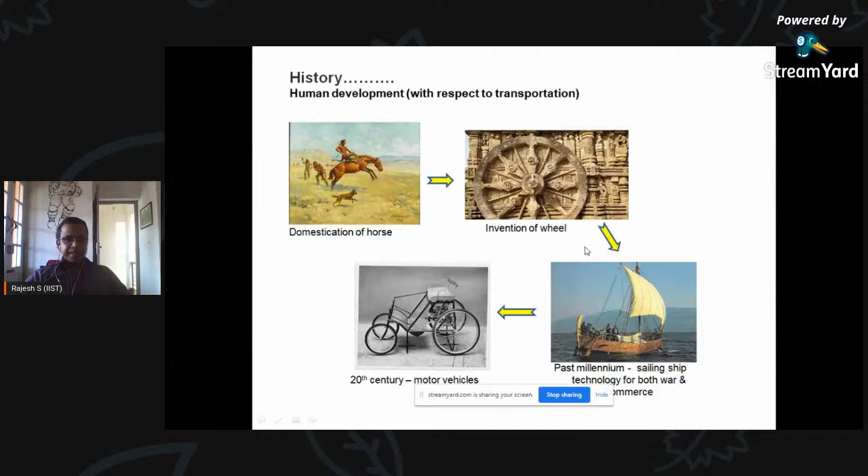If you look into aerospace propulsion, it's basically that we started seeing birds and we wanted to fly, as simple as that. You might remember the grainy images of people putting artificial wings on their hands and trying to jump from a cliff, imitating birds. That's all our ambition to fly—if birds can fly, why not us?

It's the same ambition, and it became successful with the Wright brothers' first flight. It was only for a short duration, but still it was historic. That revolutionized our transport system. Then massive improvements came throughout history, irrespective of which technology you take.

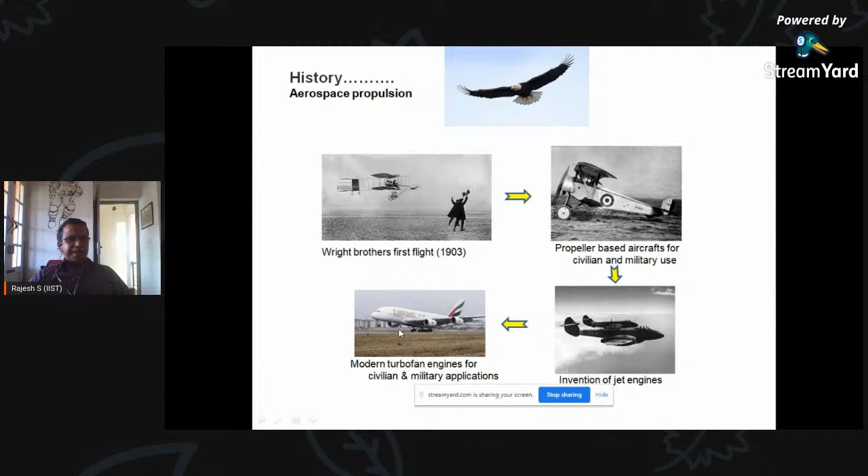Massive progress in technology comes during war, because our human wiring is greed, and we are always good at killing people—that is where technology moves fast forward. Anywhere in history you see it's always military targets, military ambition accelerating progress. Aerospace propulsion sadly was no different: the First World War brought propeller aircraft, the Second World War brought jet engines, revolutionizing aerospace propulsion. Now we have high-tech, low-polluting, very efficient engines for military as well as civilian applications. That's just a sneak preview of the history.

Now we'll go into how these aircraft fly. There are different forces acting on the aircraft. As you know, the engine provides some thrust, so that's moving it forward—that is the thrust produced by the engine. But the body of the aircraft and everything we have, it's not an ideal process.

There are always losses associated with it. There is some resistance to the flight, which in aircraft terminology we call drag. So the thrust is balanced by the drag.

Only when you overcome the drag, you are going to get a forward movement. Similarly, if you are talking about flying, there is always a weight that is going down, and you have to create some kind of force up, to create that flying movement.

That is what is called the lift. The lift is always counterbalancing the weight. When you have the lift more than the weight, you are flying. This is achieved by a nicely engineered structure in the wings, called an aerofoil.

You can see it is not a flat disc or something, it is basically a contoured shape. We have a flat lower profile, and then there is a contoured surface on the upper side. This is purposefully done so that, when you have a longer distance, the air flowing through this top surface has to travel a longer distance when compared to the air flowing underneath the aerofoil.

At this point, it has to arrive at the same time, so the top flow has to move at a much faster velocity. Higher velocity means you are producing a lower pressure on the top surface when compared to the bottom side. That means you are creating a pressure differential, with higher pressure at the bottom and lower pressure on the top.

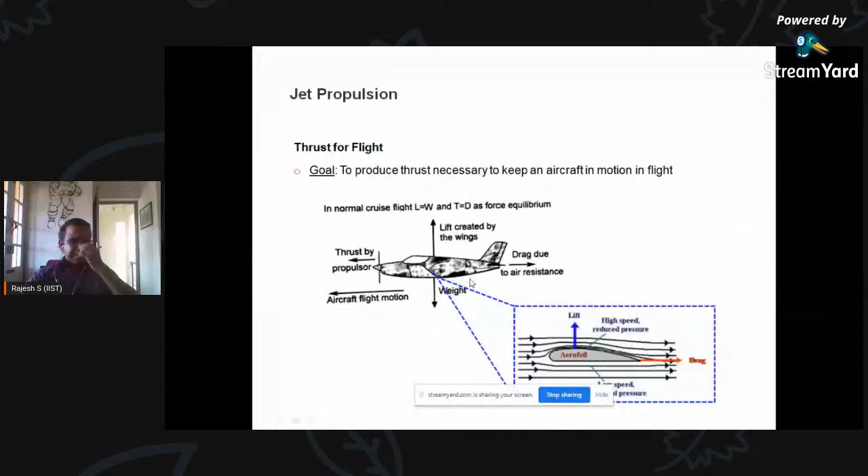The runway is where the pilot accelerates, pushes the stick forward, and the aircraft moves and accelerates forward. That is to create this huge amount of velocity over the aerofoil, so that after some distance sufficient lift is produced and the aircraft can fly. So this is basically how aircraft fly, or what forces are associated with the aircraft.

And then, you might have seen, it is not just jet engines that are flying, but there are also propeller engines. Even though propeller technology came into being in the First World War, we are still using it because there is an obvious advantage of propellers when compared to jet engines. Propeller aircraft are much more efficient at lower flight speeds compared to jet propulsion.

Jet engines need a sufficient amount of velocity to go inside and come out, so whatever momentum the jet propulsion engine creates depends upon the velocity of the air coming in. At lower velocity it produces lower thrust, and at higher velocity it produces much higher thrust. So jet engines can be more efficient at higher speeds than at lower speeds, whereas propeller aircraft are much more efficient at lower speeds than at higher speeds.

The huge propeller sitting in the front, when it rotates, can suck in a huge amount of air. That creates a huge mass flow rate of air which helps in producing a massive thrust.

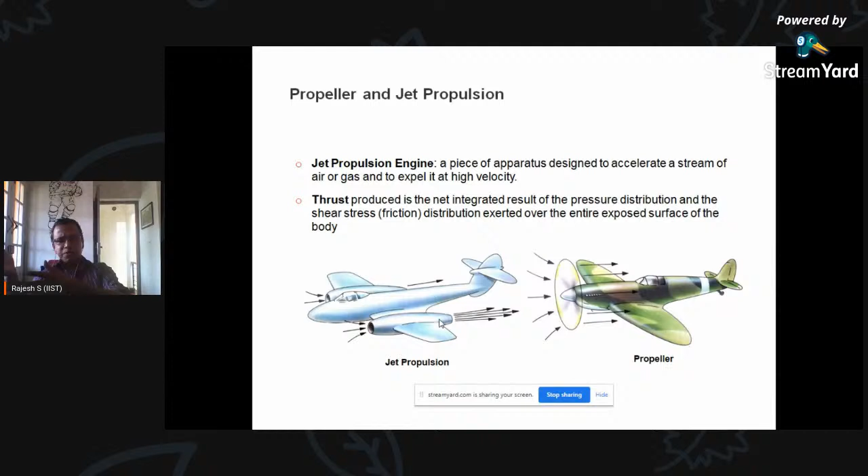So the propeller aircraft accelerates a huge mass flow of air to a lower velocity behind, whereas in jet propulsion the inlet is small compared to the propeller, so it accelerates a smaller mass of air but is capable of accelerating it to extremely higher speeds than a propeller. So there's basically a slight difference between the two: one is good for low velocity applications, the other for higher velocity applications.

So there are different engine concepts if you look into it. We started with what is called a piston engine with propeller. The piston engine is something similar to our automobile engines. These are the ones that were working in the earlier stages of development, especially in World War I and all those things - it's a complicated system.

You might have seen in some museums, you can still see the piston engines, like a collective piston, some 8 to 10 piston engines sitting along the circumference of a circle, providing power for the propeller.

That changed when gas turbine engines were developed in the 1940s - the turbojet engine that revolutionized the aircraft industry. So these are the different types of engines working.

Mostly it's based on what is called a gas turbine or turbojet engine. The other things written here - turboprop, turbo shaft, turbofan - these are all just variants of a gas turbine. So I'll talk about only the gas turbine, how it works, and maybe show on a slide how all these things work. I'll concentrate more on how the gas turbine works, since that is how our commercial airline engines are, and even in military jet aircraft it is still the gas turbine technology with some modifications.

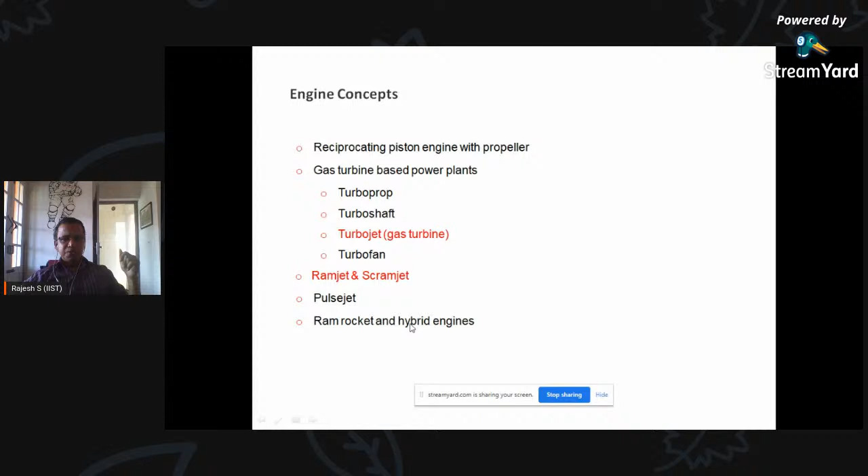Then there are new engines under development. Recently you might have heard about DRDO successfully test firing the hypersonic scramjet engine, so I'll do a couple of slides on what that is. Then there's the pulse jet - this is no longer in use, it was used in World War. And there are hybrid engines also currently under development, I might have one slide on that.

Jet engine - it is also called the Whittle engine, developed in the 1930s. It's not just Sir Frank Whittle who invented the engine, but also someone called Joachim Pabst von Ohain, a German guy, and Whittle is from UK. They were actually working in parallel on the same concept, and they came up with this jet engine almost at the same time.

The patent is awarded to both of them actually, and it works on a thermodynamic cycle called the Brayton cycle, which tells how the air coming in has its thermodynamic properties varied as it passes through the engine and comes out. Basically all this propulsion device works on the fundamental Newton's third law - for every action, there is an equal and opposite reaction.

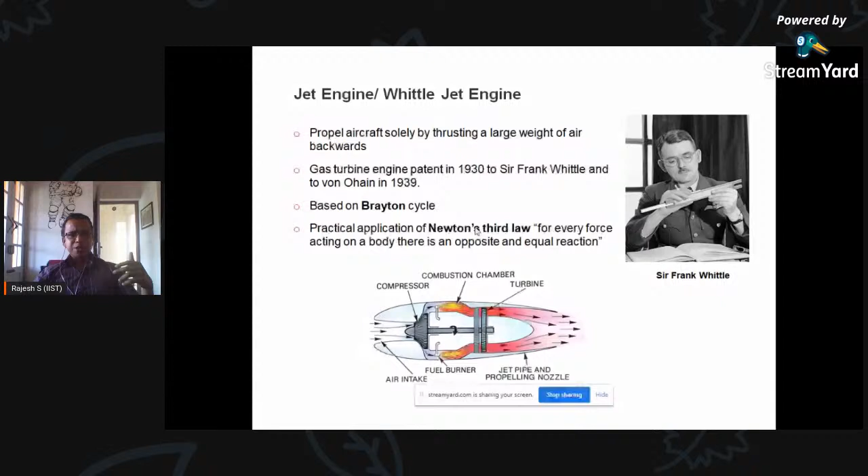Unlike a car engine where there's only a combustion chamber, a jet engine has different components doing different jobs, based on this Brayton cycle. So this is a blown up image of a turbojet engine, and you can see all these blades and things - this is basically the compressor.

Okay, so air coming in is through these different stages, or the different stages of a compressor. There is a small increase in pressure across all these stages, and finally you get a very high pressure when it comes out here, and it is sent into a combustion chamber, and then it is expanded. You can see the shaft connecting the turbine to the compressor. As the turbine runs, it provides the power for the compressor, and it comes out.

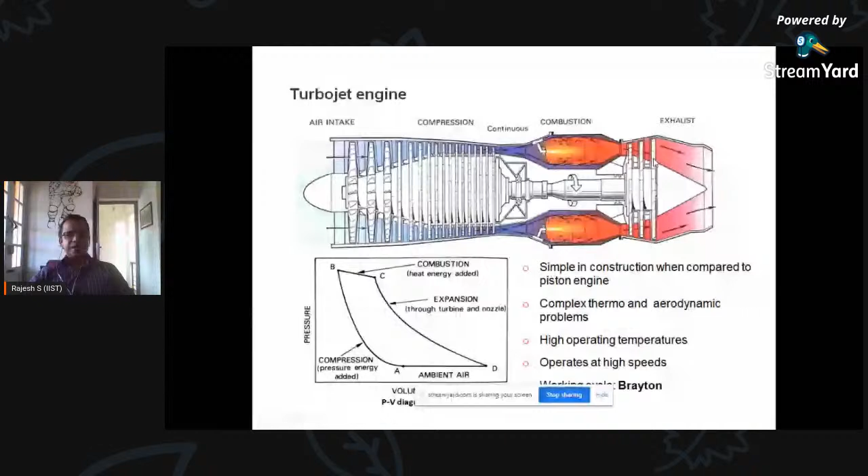A turbojet engine, it is bypassed. That's why it is also called a bypass engine, or a turbofan engine. So it splits into two streams, a bypass stream and a core stream.

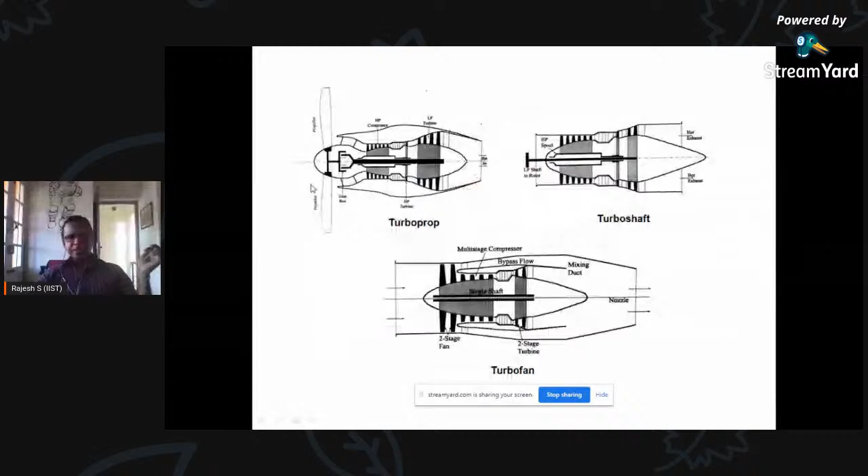It's a ramjet where in all these engines, the flow through the engine is at subsonic velocity, a very slow moving flow inside. Once inside the engine, it's slow moving. Why is it slow? Because in order to light the flame, you cannot do it easily when the wind is blowing, it's difficult to light a candle. It's the same thing, we slow it down so the flame can stabilize.

This is because of a wide range of reasons, the most important being that there is a huge pressure loss, because when you have supersonic flow coming in and you reduce it to subsonic, there is a huge pressure loss. Also, because the temperature is very high, there are dissociation losses. Dissociation absorbs energy, meaning you may not get the temperature you'd like to have at the exit at supersonic speed. So the ramjet becomes hugely inefficient beyond Mach 4 or so.

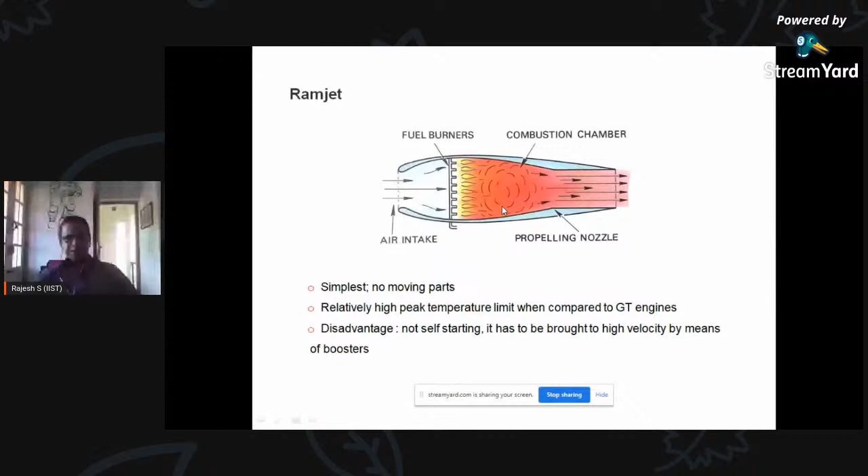That is why in a scramjet, instead of slowing it down to subsonic speeds, they maintain some kind of supersonic speed, usually around Mach 1.2 to 1.5, so that this huge pressure loss and other issues can be avoided. The rest is the same as before. But if it works, when it works, you can think of reaching speeds up to Mach 20 or hypersonic, extremely high hypersonic speeds.

We still don't have a stable engine running. The technology has been demonstrated - ISRO has demonstrated it, DRDO has demonstrated it, the US did it long time back, and the Russians have demonstrated it too. The technology is demonstrated, but turning it into a stable engine is still a hugely complicated task. So this is the scramjet engine, but this is the future, I guess.

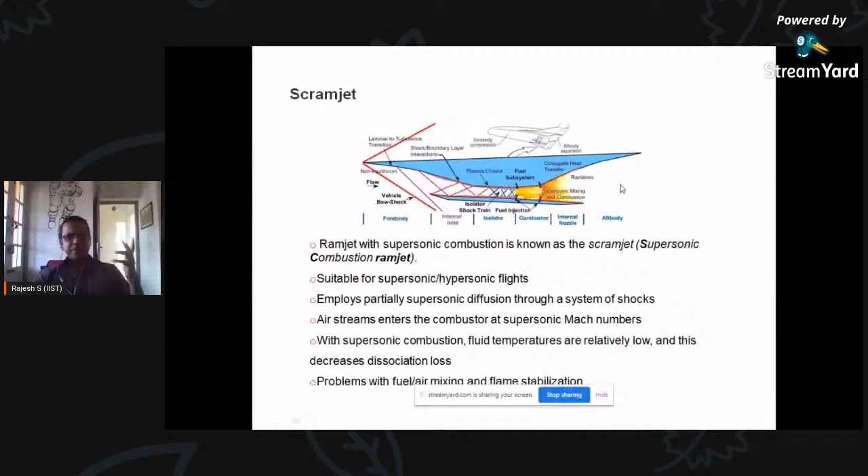But if you want to go a very far distance, you'd obviously like to move at a higher speed, meaning you need supersonic speeds. But in the atmosphere, supersonic speed is impossible because of huge aerodynamic losses and aerodynamic heating. So you have to go into outer space - that is where rockets come into the picture. Rockets go into outer space and then come back. But the problem with rockets is that if you look at a rocket engine, almost 35% of the total weight of the rocket is actually oxidizer weight.

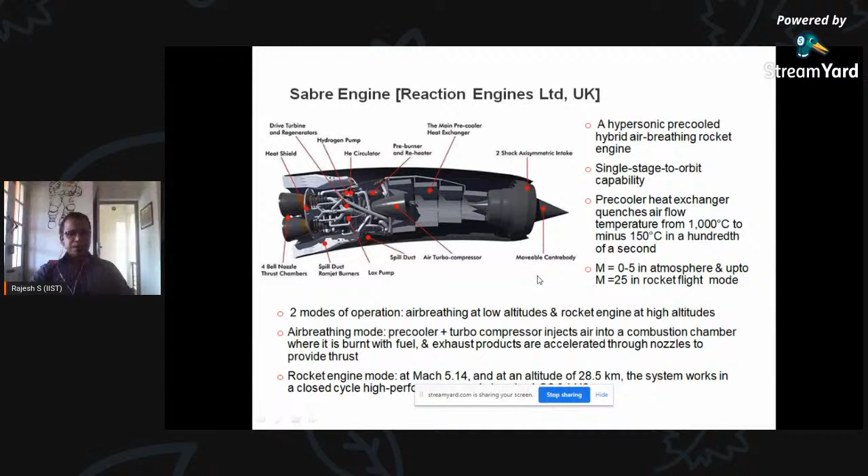Okay, so those are the operational limits. I think I'm running out of time here. God.

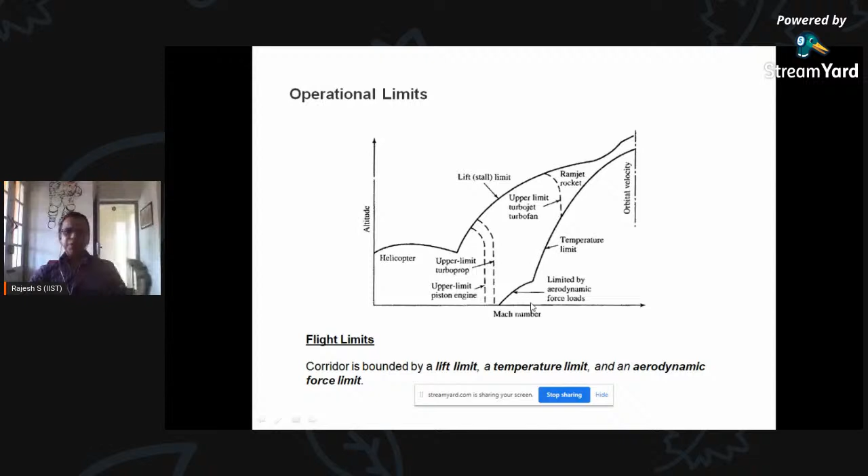So these are the limits: Mach number limits, temperature limits, aerodynamic limits. Depending on what kind of engine you have, helicopters can only go to a certain altitude, but jet engines go to higher altitude. But then the atmosphere plays a part—there's a lift limit. Jet engines have a temperature limit because of material limitations. But for low flying vehicles, since the atmosphere is very thick, aerodynamic heating comes into the picture, so there is an aerodynamic limit.

Performance parameters: one is, of course, you want maximum thrust. That is the specific thrust, per unit—less amount of air flowing through it. That's specific thrust, and this is how you characterize a jet engine. You also try to minimize fuel consumption, reducing it as much as possible—that's thrust-specific fuel consumption per unit thrust.

And then there are different kinds of efficiencies. Here is an engine: thermal energy is produced and converted into jet kinetic energy. Since it's not an ideal process, there are always losses, so there is an efficiency factor here, and the jet is converted into forward thrust, giving another efficiency. Thermal efficiency is basically the efficiency between the thermal energy and the jet kinetic energy being produced. The propulsion efficiency is how much of the jet coming out is converted into forward thrust. The overall efficiency is between these two.

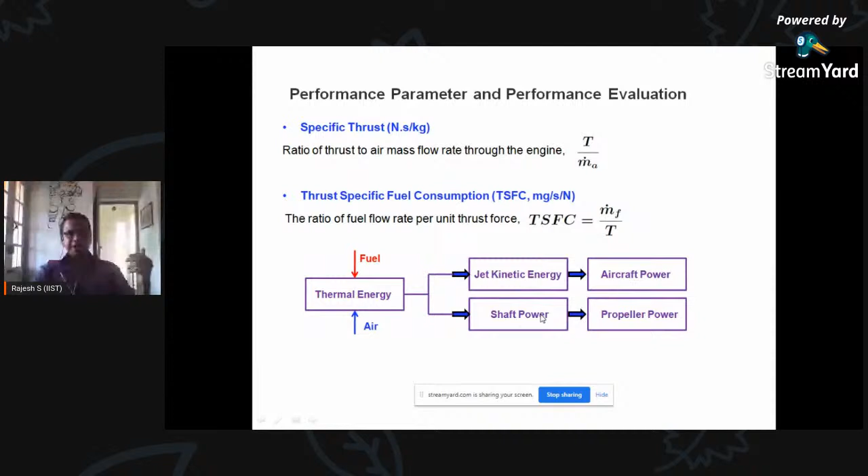So overall efficiency, from thermal energy to aircraft power, is given by propulsive efficiency multiplied by thermal efficiency. In addition, for propeller aircraft, thermal energy is also converted into shaft power and propeller power, so there's a ratio there too—propeller efficiency. These are the factors you use to judge how good your engine is.

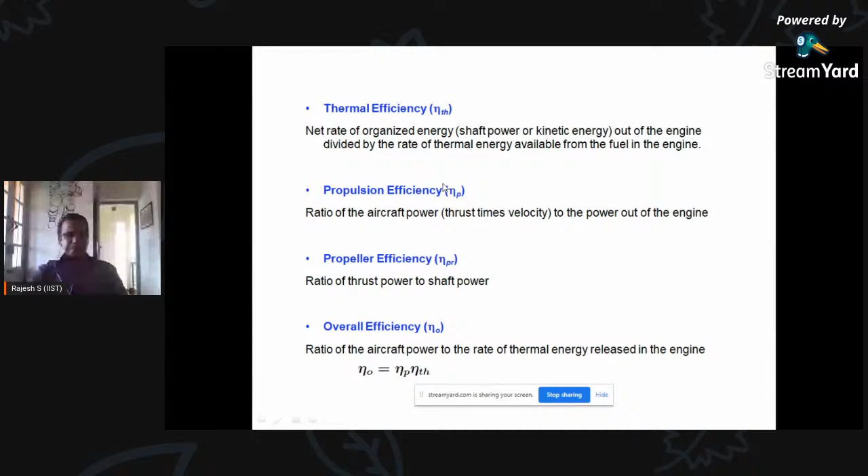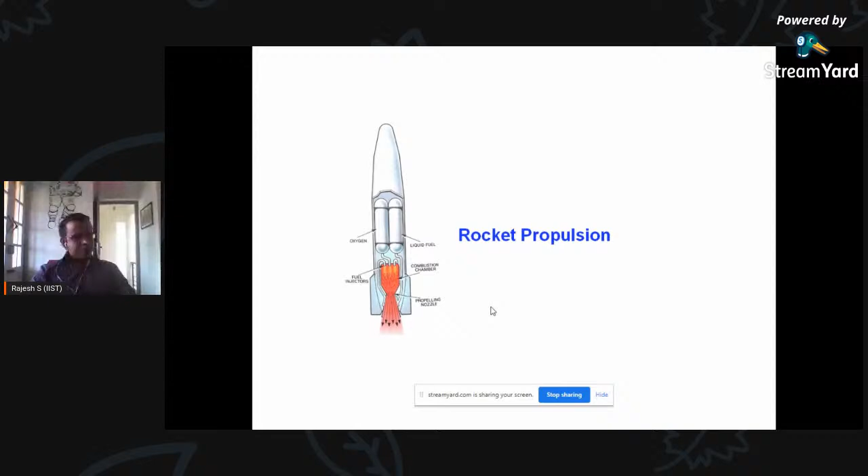Okay, so that is about aerospace propulsion. Now we'll go into the rocket propulsion.

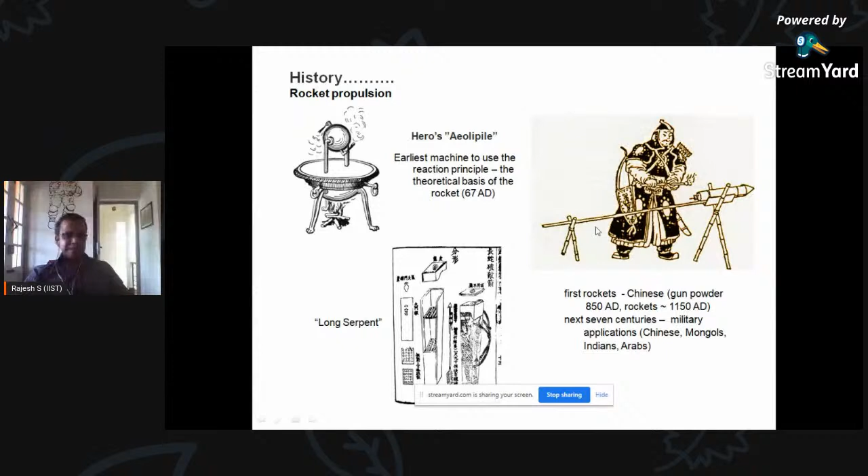This is different. Basically the history, if you look into the rockets, the Diwali rockets and all those things, those kind of rockets are the beginning. The Chinese found gunpowder, and then they realized it can be used for flying objects, so they started using gunpowder. Again, military campaign is what motivated them all the time. They invented the gunpowder, and then the next seven centuries is military application. Even the Indians used it, best example being Tipu Sultan using rockets against the British. Okay, so military always plays a key role in whatever kind of development that we are talking about.

The pioneers in rocket propulsion - it's not Frank Whittle or something. These are the three pioneers, in the 20th century. These are the people who actually developed, or are the reason for the rocket technology we see today. First one is a Russian mathematician, Tsiolkovsky. He never worked in experiments, he never did any experiments, but he developed equations to show that rocket propulsion is possible and can be used for space applications, even outside space, interstellar applications kind of thing.

So if there is a rocket, there is something called the rocket equation, which was derived by Tsiolkovsky. And Oberth worked on it further - he gave a detailed version of those equations, and he even showed that you can use cryogenic engines for space applications. Where Tsiolkovsky showed how we can escape the Earth's gravitational pull, Oberth showed that you can use it for interstellar space applications, using cryogenic liquids to achieve that. Interestingly, his PhD thesis, which talked about how rockets can be used for space application, was rejected by the university. Funny.

Then the actual engineer - he was also a physicist - but the engineer of the three is Robert Goddard. He's an American engineer, and he was also a professor at Clark University. He holds close to 200 patents related to rocket propulsion, mostly related to turbo machinery used for rockets. He's the first guy who flew a liquid propellant rocket - I think it's around gasoline, liquid oxygen kind of thing. So from the engineering perspective, he contributed a lot, and the US bought back all his patents in the 60s for close to $1 million. So these are the three pioneers we see today.

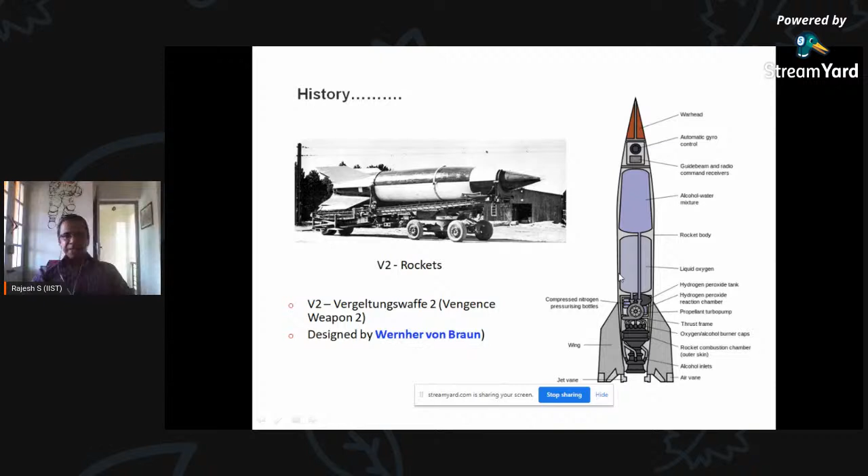So you have a propellant that is alcohol, and an oxidizer which is liquid oxygen, shown here. It's basically a kind of semi-cryo engine at that time. They used it with lethal force in the Second World War. After the war, the US smuggled this guy - he was a Pakka Nazi, to say, and he used slave labor from concentration camps for making his rockets. But after the war he was never prosecuted - in fact the US smuggled him over and gave him all the facilities to develop their rocket program. So the father of the US rocket program is actually a Nazi, Wernher von Braun. He used the technology to take people to the moon - whatever Apollo rockets you see that took people to the moon were actually based on his design. This is what he developed - the monstrous rockets that took the crew to space, to the moon. So this is the history.

The Soviets first launched the artificial satellite, Sputnik, in 1957. Yuri Gagarin made the first human space flight. And the biggest event was the moon landing, which was an absolutely stunning victory for NASA against the Soviets.

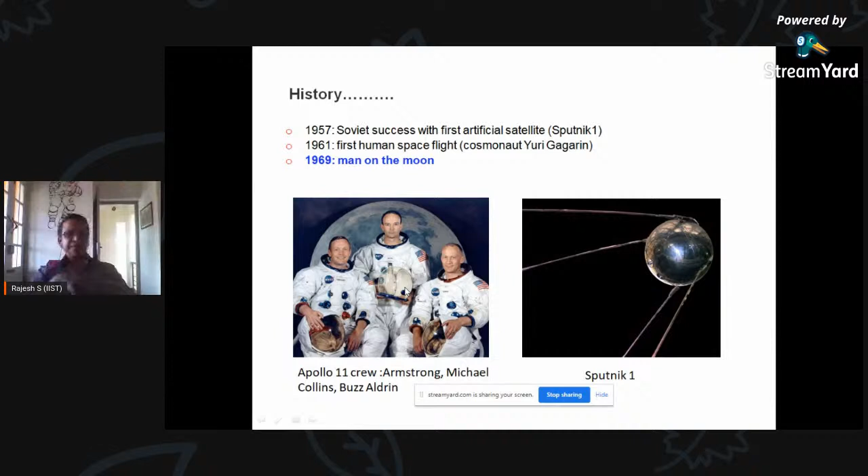But then there was a long pause for a huge amount of time afterwards. Basically, you haven't heard of big things in the meantime, isn't it? So it's always just rockets going up, somebody doing spacewalks, and things like that.

Finally, in recent years, a guy called Elon Musk came into the picture and revolutionized space flight again. He came up with reusable rockets, which was kind of a fancy term because people thought it's nice to have but difficult technology. Then one computer geek came and showed it's not really so complicated, I can do it.

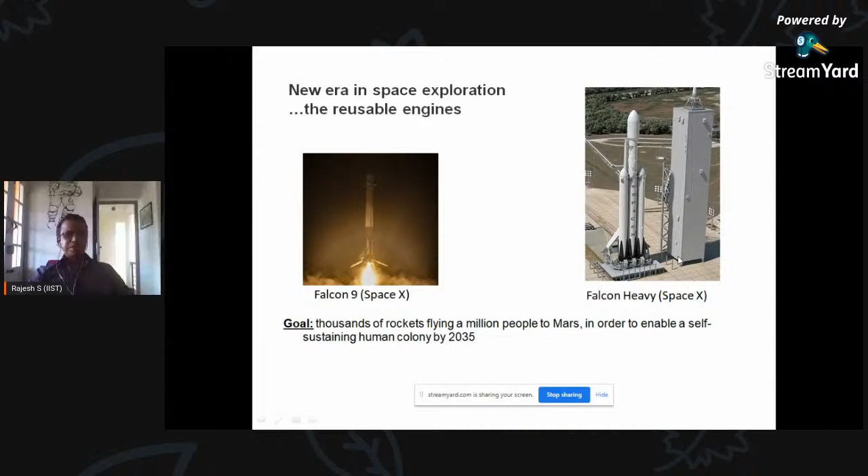So now space exploration is again in version 2 mode. Everyone is thrilled, everybody thinks we can make a rocket, and new startups are coming up thinking if Elon Musk can do it, why can't we? They have been developing new technologies almost every 5 years. First they developed the Falcon, then the Falcon Heavy, and now they are looking into Starship going to Mars. It's all interesting times ahead.

So we should also talk about what ISRO is doing. We had humble beginnings but great ambitions as well. We first launched our sounding rocket in 1963. You can see the first launch - it was so small and lightweight that it was actually transported using a bicycle to the launch station in Trivandrum. The next time they used a bullock cart because it was slightly heavier. But that's where we started.

We also had our successes over the years. We launched our Indian satellite Aryabhatta in 1975, and then Rohini.

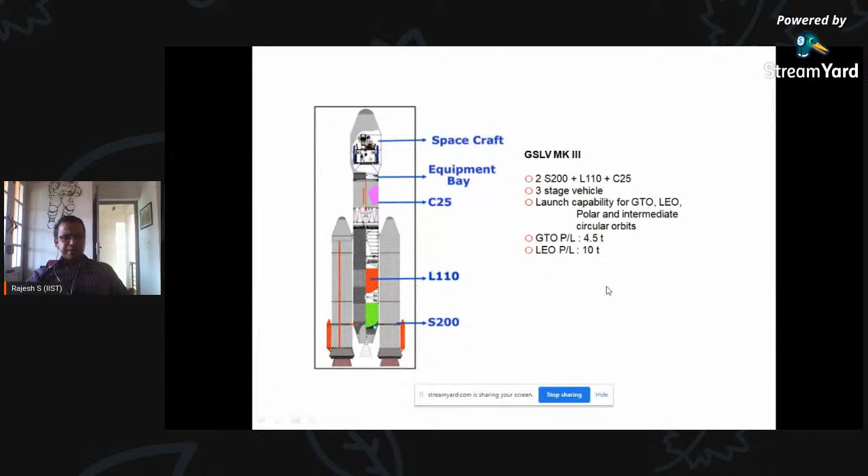Okay, so in rocket propulsion there are fundamental terms I'll be using. One is momentum - mass into velocity is momentum. Then there's what is called impulse, which is a change in momentum. Force is the rate of change of momentum - basically this is Newton's law.

This is one term you commonly hear in news - whenever they say we have developed an engine, what is the specific impulse? Specific impulse is the impulse delivered per unit mass of propellant - per kilogram of propellant, how much impulse can that propellant generate, that is called specific impulse. If you use mass of propellant, the units you get are Newton second per kilogram, but usually you hear it in seconds - so we say solid rocket motors have a specific impulse of 300 seconds.

So where does that come from? It is when we talk in terms of weight flow rate - instead of kilogram per second, you say it in terms of weight.

Multiply with the gravity. So basically what specific impulse tells you is how much thrust is generated by the fuel per unit flow rate of the fuel. It tells you about how far the range of your aircraft is—per kilogram of fuel burned, how much thrust it can generate. So the higher the specific impulse, the more efficient your engine is, or the longer range it can go. For example, solid rocket motors are around 300, whereas ramjet or turbojet engines are around 1600, because you are breathing air. Basically, air-breathing engines are much more efficient in terms of range than a rocket engine.

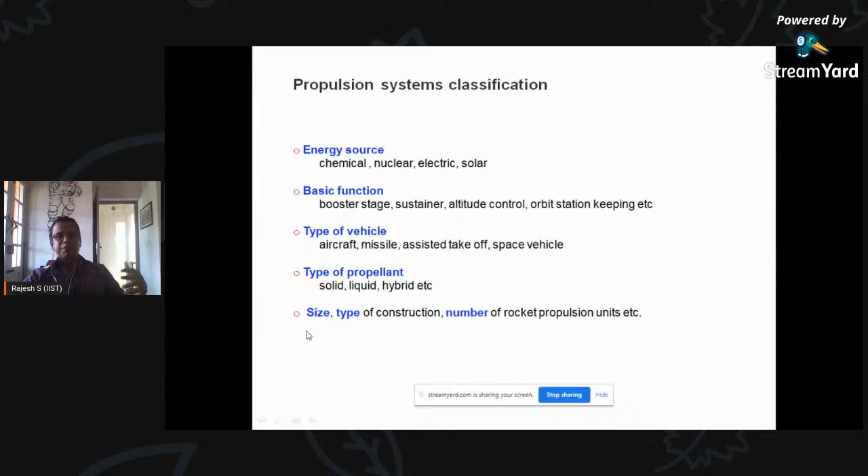We can divide the rocket propulsion system based on energy source—chemical rockets, nuclear rockets, that kind of thing—or based on what function it does. If you're starting from standstill, we call it a booster stage, and the later stages we call sustainer stages, for altitude control etc. Based on type of vehicle, we can call it an aircraft, or if it is military application, a missile, space vehicle, etc. Based on type of propellant, it can be solid, liquid, or hybrid, or we can classify by size, type of construction, or number of stages—like a 3-stage rocket or 2-stage rocket. These are the different system classifications.

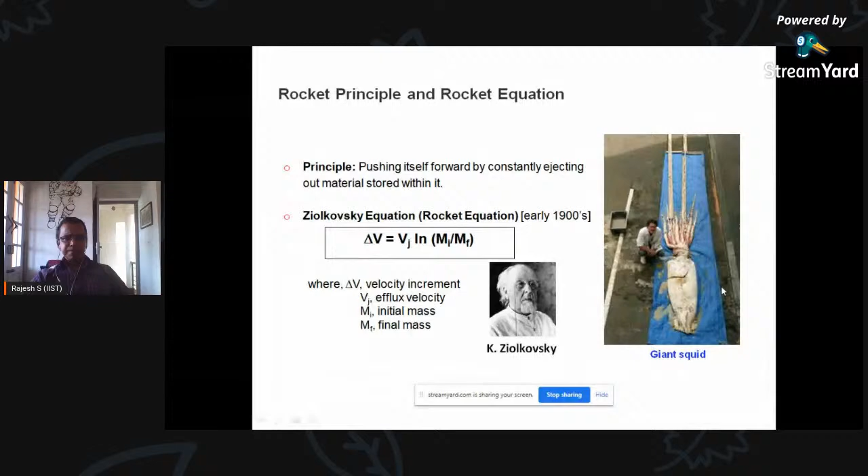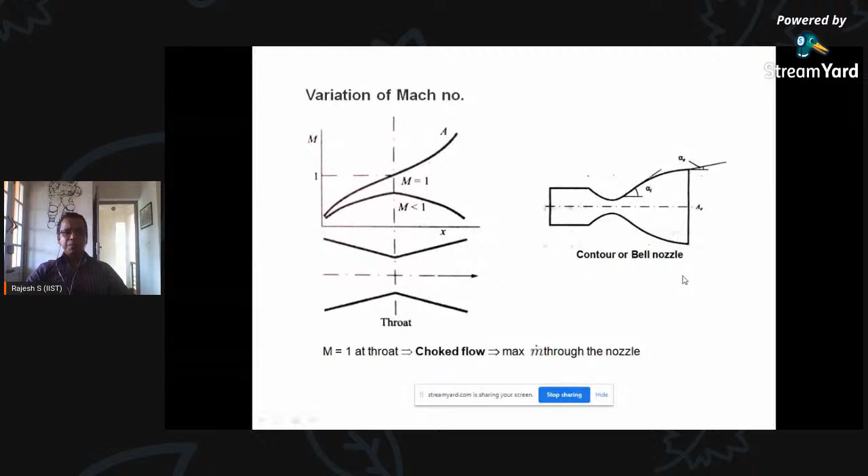But if your flow achieves a Mach number of sonic at this minimum area, then the remaining section will act as an accelerator, so you can get supersonic velocities at the exit. So if you want to accelerate a flow to supersonic conditions, you need a converging-diverging nozzle at the exit. This is a typical contour of a rocket nozzle, called a contour or bell nozzle, designed to reduce the losses associated with it.

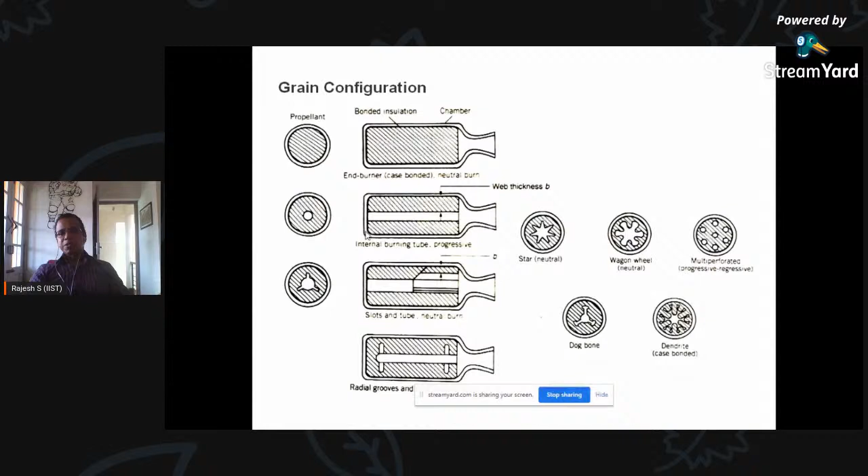So you'll have continuously increasing thrust because the burn area, the inner surface area, is increasing. But if your rocket needs a continuously constant thrust, you have to be very creative. You have to generate some kind of surface so that as the area increases, you still produce only the right amount of thrust. That is what is called neutral.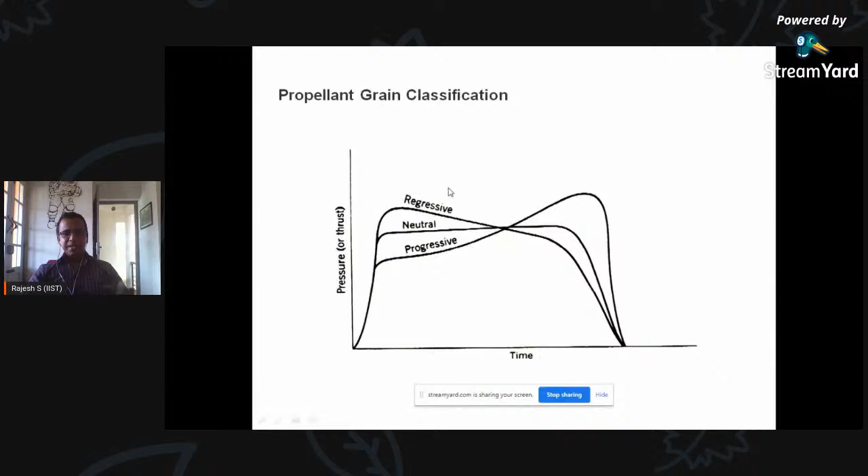Okay, and then there are maybe cases where you need to slow it down, so you have to design it that way. That's called a regressively burning propellant. Solid propellants are usually, the terminology people use, called a grain. A grain is nothing but a solid propellant. So this is the grain propellant classification.

Liquid, as the name suggests, means the propellants are liquid. So you have liquid oxygen and liquid fuel. That is in case of a cryogenic propellant, but it can also be some other kind of thing like N2O4, which is very commonly used and is not cryogenic, with the fuel being hydrazine. For example, the Vikas engine from ISRO has a liquid propellant engine, but it is not a cryogenic engine. Cryogenic engine is something different. There, it's all in liquid stage.

So what is the difference between liquid and cryogenic liquid? Cryogenic, the term we use when the temperature of the fluid is below 123 Kelvin. It's easy to remember, 123 Kelvin. Below that temperature, if the propellant is stored, it is called a cryogenic engine. Hydrogen is a gas, oxygen is a gas under normal conditions, so if you want to carry it, you have to liquefy it because it reduces the volume. Hydrogen liquefies at 20 Kelvin and oxygen at 90 Kelvin. Both are below 123 Kelvin, and that is why it is called a cryogenic propellant, because they are very low cold temperatures.

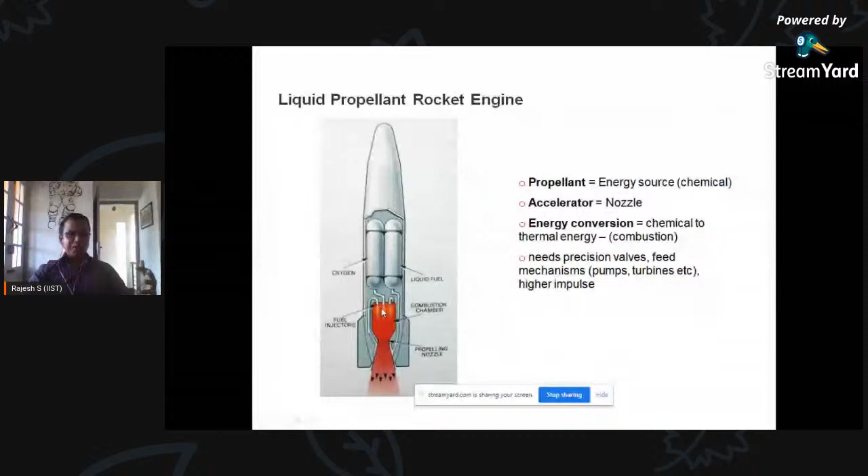So engines using cryogenic propellants are called cryogenic engines, whereas other liquid propellant engines we could just call liquid engines. But a cryogenic engine is also a liquid engine. We carry both in liquid form, and the rest is the same - you spray it into the combustion chamber, then burn, and everything. It's the same technology. Just wanted to give you an overview.

100,000, more than 100,000 thrust. The first stage had, I think, 4 or 5 of them, so you are looking at something like 400,000 thrust being produced in the first stage. It was a monster, really monstrous engine. It's an amazing piece of technology.

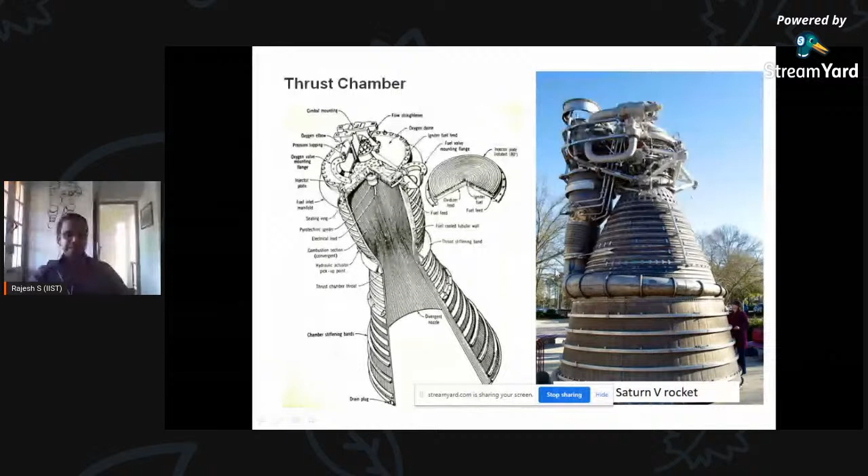And you can see it was developed in the 60s and 70s. We are now in 2020, and we're still talking about going to the moon, isn't it? This was with whatever technology was available then. They produced this monster engine that went up to the moon. Amazing piece of work, it's really good.

And usually all these rockets have around 100 injectors sitting here. This one had around 110 injectors inside, and these are arranged in certain patterns. So that's just to give an idea about how these engines look. Even ISRO's liquid engines have close to 100 injectors sitting inside. There's a reason why everything is called rocket technology.

Okay, it's not an easy thing to master, but it's an amazing thing. So this is the hugely complicated process that takes place. If you take one injector, the liquid coming out has to be broken up into pieces.

It first becomes a filament, then filaments into ligaments. Then ligaments are atomized into droplets. That's just the first part of the story. These droplets then evaporate, so the fuel is produced, and the evaporated fuel mixes with the oxygen. Then it's ignited, and that's when you get the flame.

That's not where the story ends. That flame you need to stabilize. You need a stable flame. That itself is a complicated process. When all this series of processes is successful, then you have an engine that is working stable.

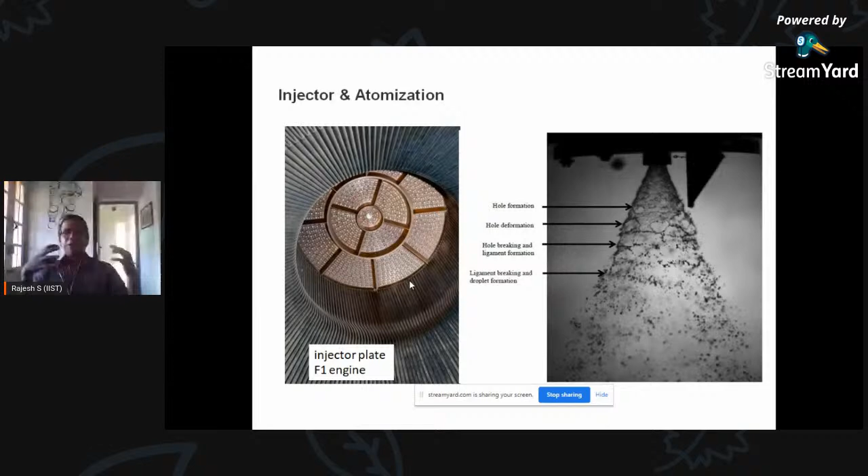If you have a chamber pressure of 60, that means the injection pressure should be higher than that. So this fluid has to be pressurized to high pressures. How do you achieve it in rockets, in liquid engines? You have what is called turbo machinery, turbines, fuel pumps, and oxidizer pumps. There are huge powerful turbines or pumps sitting there. To run these pumps, you need some kind of powering device, and that is done by, as usual, a turbine.

In order to drive the turbine, just like in jet engines, you need a combustion chamber where hot gases go into the turbine. So you produce an additional engine inside the main engine, or alongside it, that is called a pre-burner or a gas generator. Its sole purpose is to run a turbine to provide power for running the fuel pump or the oxidizer pump, so that sufficient power for the injection is achieved.

So this is what is called a gas generator cycle. The engine cycle can be open or closed. When these turbine exhausts are thrown out, it is called an open cycle. When they use this exhaust again for the main engine, it is called a closed cycle. That is what is shown here. The exhaust from the turbine is not thrown out like before; it is actually sent inside the main engine.

So here the difference is that you don't see a pre-burner in this configuration. What they do is the fuel coming in runs along the sides of the rocket nozzle because it is hot. If it is liquid hydrogen, it becomes gaseous and develops pressure, and it passes through the nozzle contour. So you have a high pressure gaseous thing coming out, and that is used to run the turbine, doing away with the pre-burner. That makes it much simpler. That is what is called an expander cycle, because it is expanded.

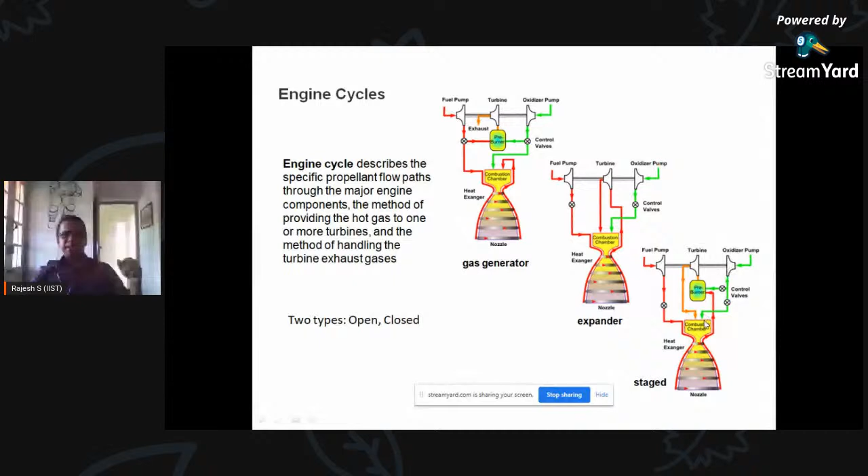Most of the time you see this thing, the gas generator cycle.

So in rocket propulsion, we talked about the parameters of interest in aerospace propulsion for air breathing engines. For rocket propulsion, as I said, it's ISP. ISP tells you how good your engine is. A solid rocket motor is around 300, a better one, cryogenic, is around 400, and so on. So what does ISP tell you? It's the thrust per unit mass flow rate of the propellant, and it is divided into two parts.

There is one thing called C star, and there is CF. C star is called the characteristic velocity, and CF is called the thrust coefficient. I won't go into the expression, but let me tell you what C star tells you.

If you look into the rocket chamber, I can divide this rocket engine into two parts. One is the combustor, where the fuel is burning and the hot gases are expanding, and that leads into the nozzle section. C star tells you how good your combustor section is, or C star tells you about the propellant.

You can come up with different types of propellant. The propellant that you have designed or are using, how much pressure that propellant can develop for a given mass flow rate — it tells you the pressure generating capacity of your propellant. Higher the C star, the higher pressure it can develop. That's what C star tells you. It's an index of the performance of the propellant.

And CF tells you, for a given pressure, how good your nozzle is — how fast the nozzle can accelerate the flow. The thrust is generated by this nozzle, so the thrust generating capacity of the nozzle is described by CF. So you have the index of propellant performance multiplied by the thrust generating capacity of the nozzle — that, in effect, is your ISP.

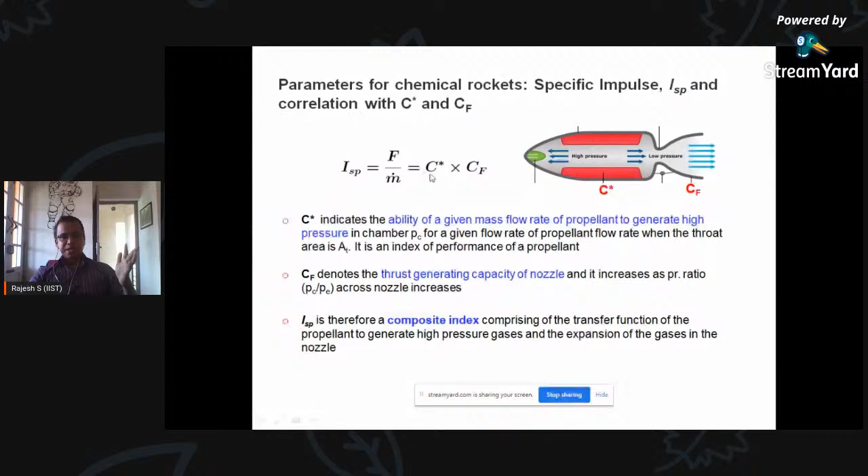So if you want to improve your ISP, you have to come up with a highly efficient fuel that generates a high amount of pressure, and a nice design of nozzle that can contribute to the thrust. That is what ISP is about. That's all about the main rocket propulsion.

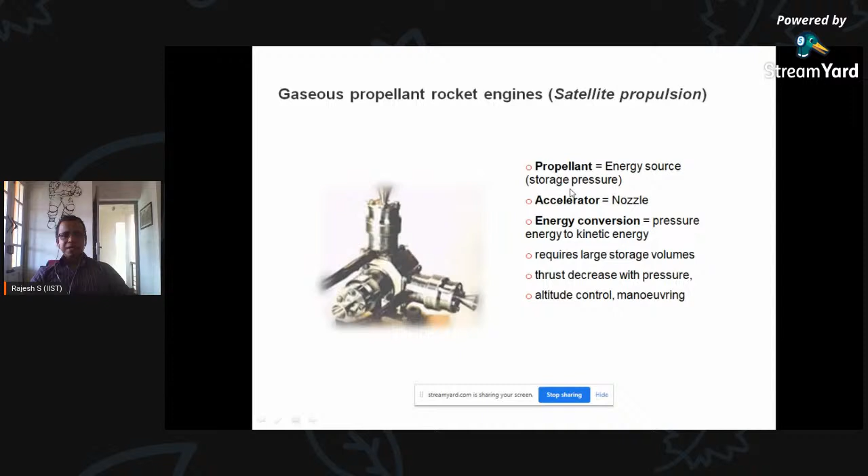Then there are rocket propulsion technologies used for satellite propulsion. This is basically a small rocket engine where high pressure gas is expanded through a nozzle — it is an engine. This is what is called a gaseous propellant rocket engine. It's used for satellite propulsion, attitude control, orbit station keeping, and so on. The propellant is stored as pressurized gas, expanded through the nozzle.

Then there is the hybrid rocket, where 'hybrid' comes from the fact that you have a liquid oxidizer used along with a solid fuel. It's very simple: you have a solid rocket motor, and it is supplied with a liquid oxidizer sprayed into the solid rocket motor and ignited — that is what is called hybrid.

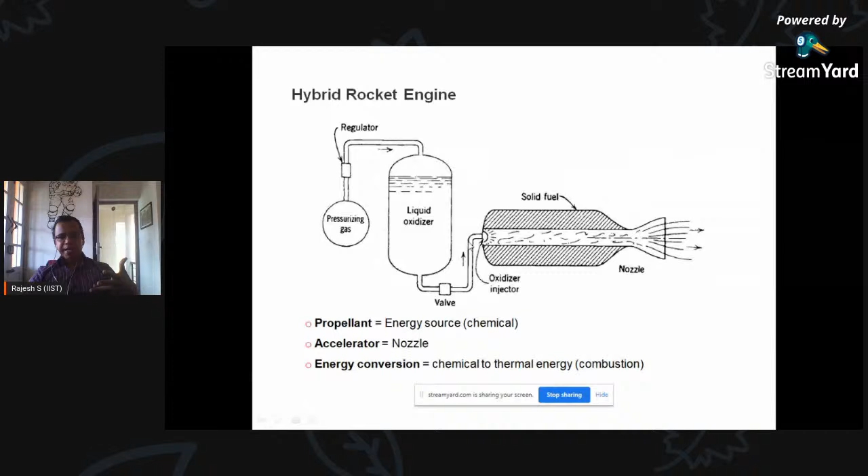The advantage of this compared to a solid rocket is that you can start and stop it. When you switch off the liquid oxidizer, the engine stops, and when you spray it again, the engine can start again — unlike a solid rocket motor. That is why this is being used, but there are no other aircraft currently using it. This is the only working hybrid rocket motor running in the world right now. They are still testing it, it's not in full active duty, but you can see YouTube videos on that.

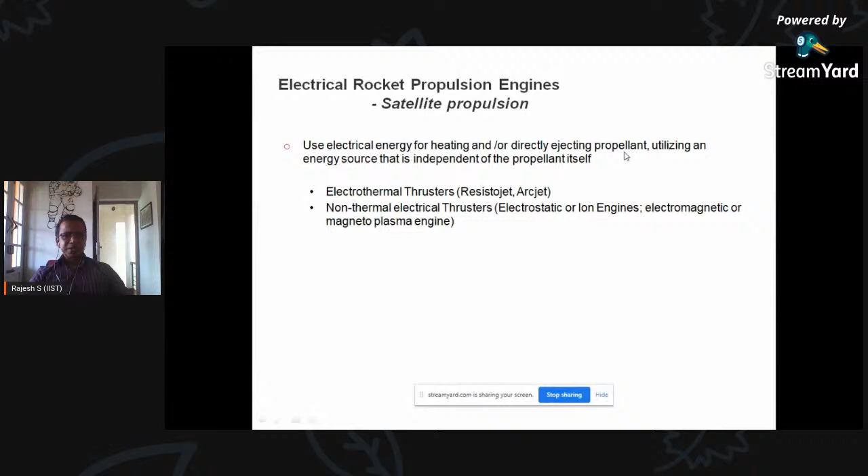Then there are satellite propulsion rocket engines. Nowadays you can see electric propulsion engines being used. What does electric propulsion do? Unlike car batteries, it's a different concept. We use electrical energy to impart thermal energy into the propellant. Here we are not burning the propellant.

For example, the arc heating electric process is one kind of device where an electrical source is used to heat up the propellant gas coming in, like hydrogen or nitrogen. The electrical energy can be resistive heating, arc heating, or anything that provides thermal energy for heating, and the rest is like a normal thing. This is called an electrothermal thruster, because you use electricity to heat up the propellant.

Then there are non-thermal electrical thrusters. Here you don't have a CD nozzle like any other rocket engine, but this is an ion engine, or Hall thruster, an electric propulsion. ISRO has an engine running satellites, and many satellites now come with electrical propulsion engines. Here it's not a CD nozzle, it's like a constant duct. What it does is take propellant gas and use electrical energy to ionize it - you rip electrons out of it, make ions, and then use electromagnetic force to accelerate them.